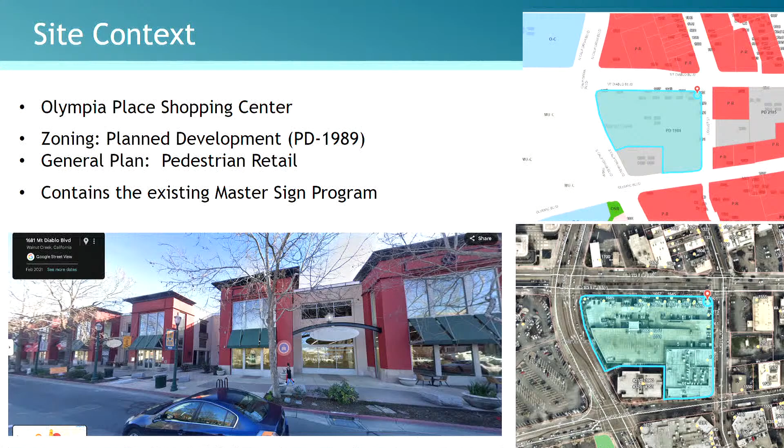Just to quickly orient you with the site, the Olympia Place Shopping Center is located along multiple frontages. The site is zoned planned development with a general plan designation of pedestrian retail. The existing shopping center does have a master sign program that applies to all of the buildings within the center, with different sign criteria tailored for each building frontage and tenant location.

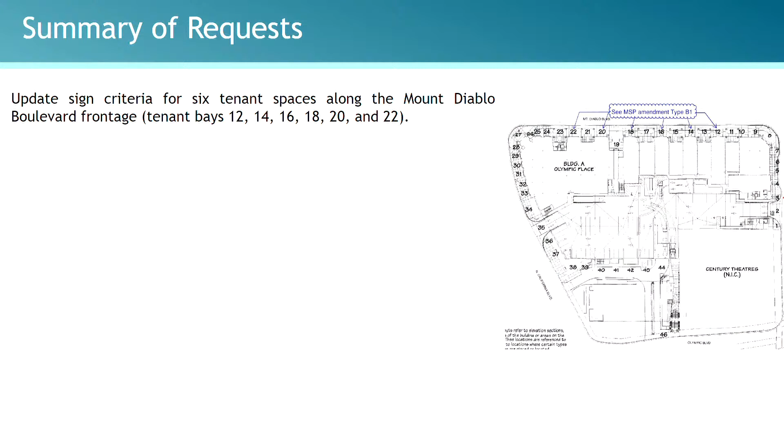The request tonight is to amend the master sign program for signage along Mount Diablo Boulevard. The applicant is requesting to update the sign criteria for 6 specific tenant spaces listed on this slide, all along Mount Diablo Boulevard.

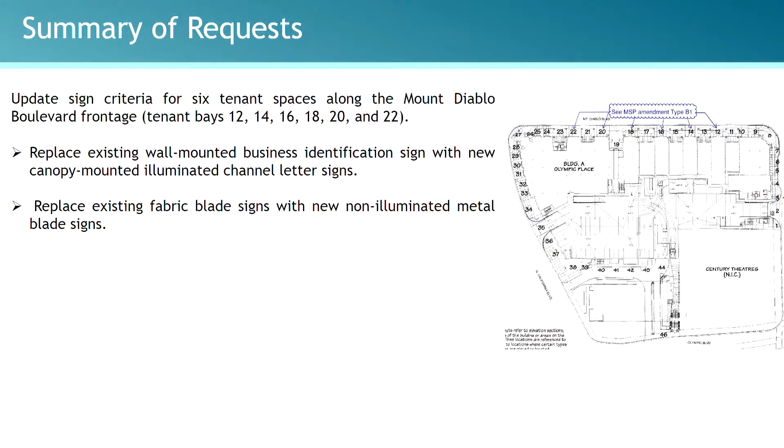The applicant is requesting to replace the existing wall-mounted business identification sign with a new canopy-mounted illuminated channel letter signage, and also replace the existing fabric blade signs with new non-illuminated metal blade signs.

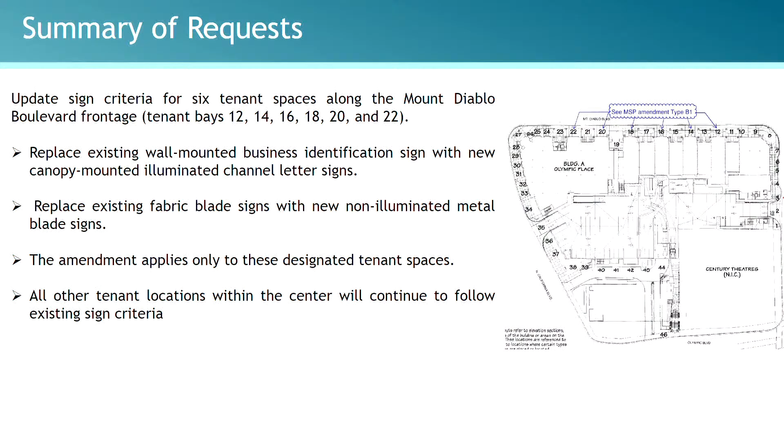The amendment before you tonight does apply only to these designated spaces. All of the other tenant spaces within the shopping center will continue to follow the criteria in the existing sign program.

The applicant did mention that the amendment is intended to modernize the property signage, providing a more contemporary and integrated design with some of the recent changes to the shopping center fronting Mount Diablo Boulevard, which was a new paint scheme, and also replacing the fabric awnings with metal canopies.

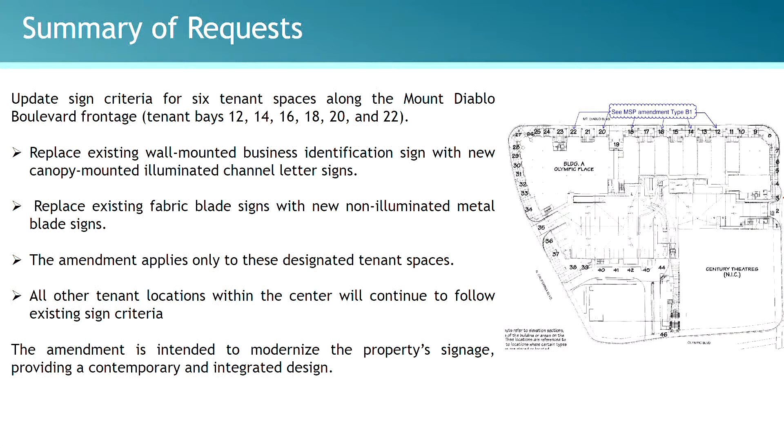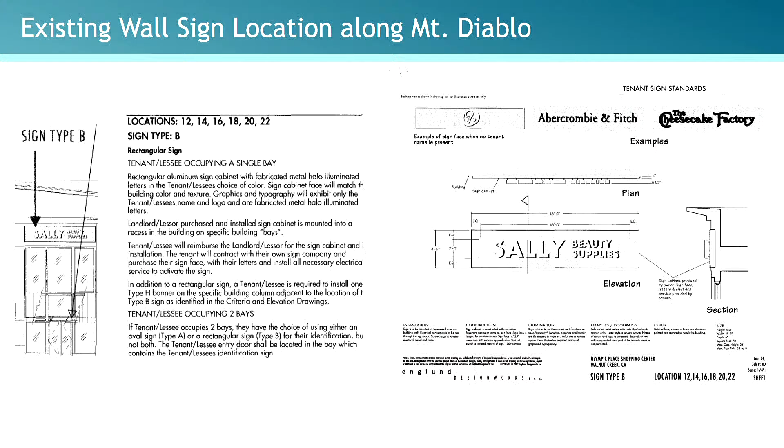Here is what the existing wall sign location along Mount Diablo looks like currently. Signage is allowed on the upper portion of the facade for these specific locations. It's identified as sign type B.

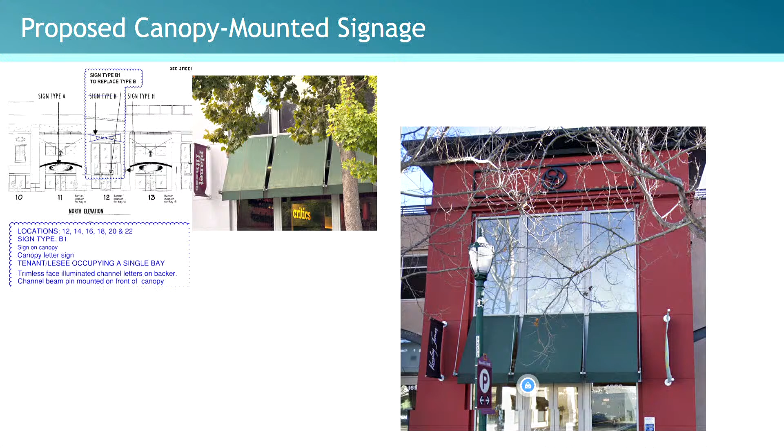So the applicant is asking to remove the upper portion location, as you can see with that sign or logo installed on the existing storefront. It's very high, so they want something more eye level, installed on the new metal canopy that will replace the fabric awnings.

Each sign does measure 2 feet 3 inches in height with a sign area of approximately 21 square feet. Graphics limited to tenant names and logos will be allowed on these sign faces.

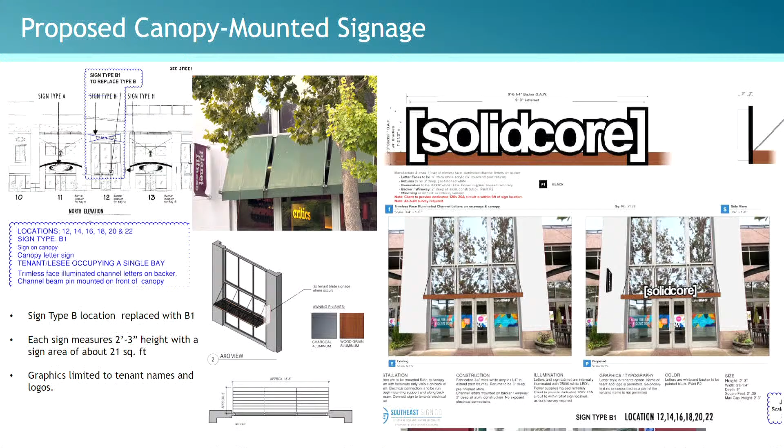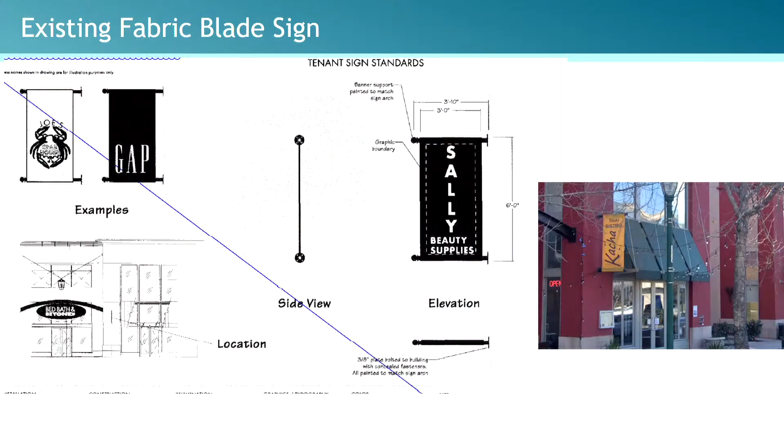Here is the existing fabric blade signs that you see currently within that shopping center, and a photo of an actual one that's there now. The applicant is proposing to update those because the existing ones are worn out and outdated.

The new metal signs will be painted satin black with white vinyl graphics and lettering. They will be non-illuminated and meet the sign limitations, which is typically 4.5 square feet allowed for blade signs, so they'll stay within that parameter.

This project is exempt from CEQA or environmental review, as it's only a change in signage criteria to an existing commercial shopping center. There's no expansion of the footprint or any exterior changes that would require environmental review.

With that, staff does recommend that the Design Review Commission approve the Master Sign Program Amendment for Olympia Place, subject to the conditions of approval in Attachment 1, the draft resolution for this project. I'm happy to answer any questions, as is the applicant. The applicant does not have a formal presentation, but is happy to answer any questions.

Thank you. Does anybody have any questions? I have one, just out of curiosity. So it's only the signs along Mount Diablo that are changing. Why is it only those signs?

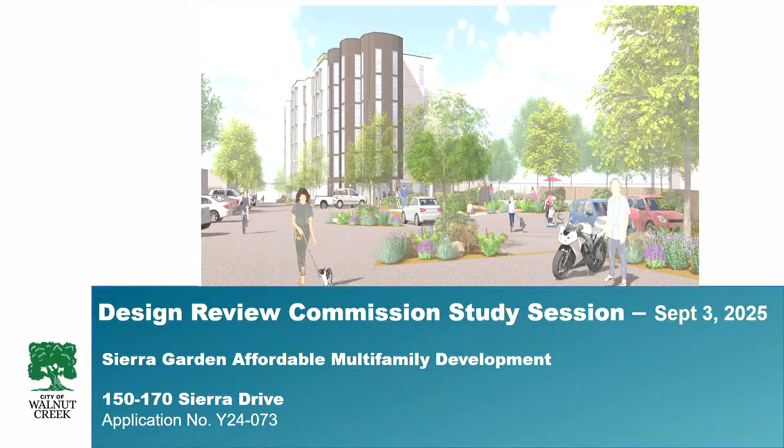I'm back. Simmer Gill, Senior Planner with the city. We are here tonight to consider Design Review Commission's input on the proposed design of the Sierra Garden multifamily development, located at 150-170 Sierra Drive. The applicant, Jonathan Asman, is here tonight, as am I, to answer any questions you may have after this presentation.

To provide some site context, the site is zoned planned development with a general plan designation of multifamily, very high density. This site is located within the city's housing inventory site table, which means the city envisions development of more housing on this parcel. The site is 1.4 acres, with existing 1 to 2 story structures consisting of a 29-unit development.

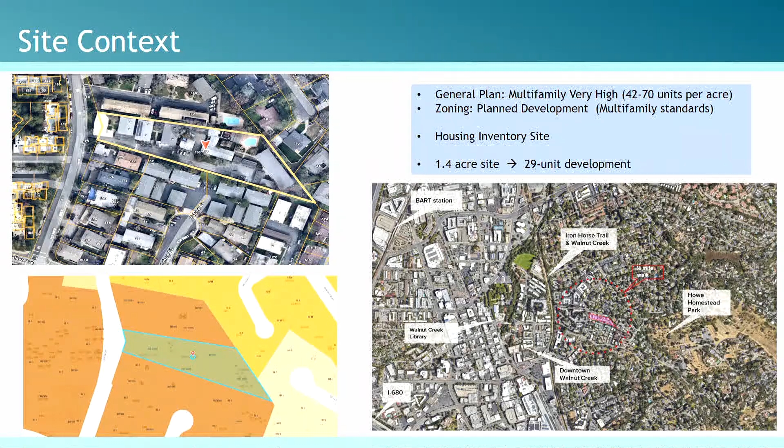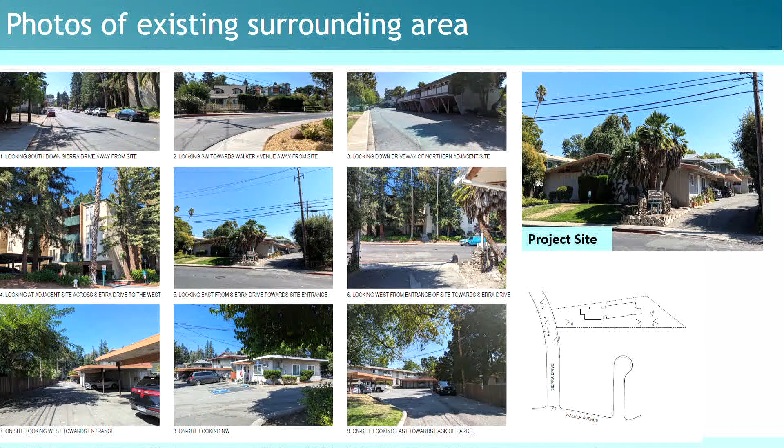Here are photos of the surrounding area as well as the project site. I wanted to highlight that both adjacent properties to the north and south are multifamily developments, I believe 2 stories, and the one directly across the way to the west is a 3-story multifamily development. As you drive further north, there are residential properties, single-family homes.

So the request tonight is to demolish the existing 29-unit structures to construct a new 6-story, 87-unit affordable development. The project consists of a mix of 1, 2, and 3-bedroom units. New landscaping is proposed, and 58 new surface parking stalls are proposed. There is also a request for tree removals and a drip line encroachment permit.

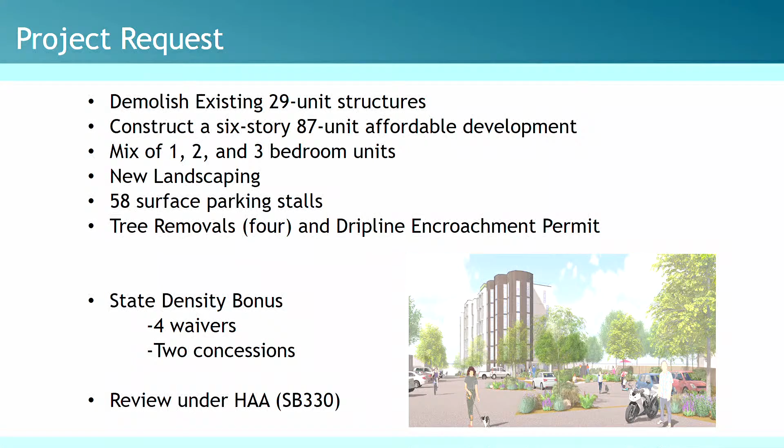This project is being processed under the State's Housing Accountability Act and State Density Bonus Law, under which the applicant is requesting 4 waivers and 2 concessions to the city's development standards, which I'll go into more in the upcoming slides.

Tonight the Design Review Commission's role is essentially to provide feedback, that initial look at the project, on the design of the new development, the requested tree removals and drip line encroachment permits, as well as the requested waivers under state density bonus law. However, the approving body that will consider these entitlements will be the Planning Commission.

As mentioned earlier, this project is being processed under the Housing Accountability Act, also known as SB 330, which essentially limits the city's review if the project meets all of the applicable objective standards. The project does fall within that criteria, as it is a residential project with multiple housing units, and it is consistent with the city's objective standards as well as the city's design standards.

Going over the base density for this project, it is a 1.4 acre site. The multifamily very high density range is 42 to 70 dwelling units per acre, which equals 99 units as the base density. It is a 100% affordable project, so the applicant is entitled to an 80% increase in density, giving them 79 additional bonus units. With the bonus units, they could have essentially 178 units allowed for this site. The applicant is building 87 units, which complies with the zoning and base density of the general plan.

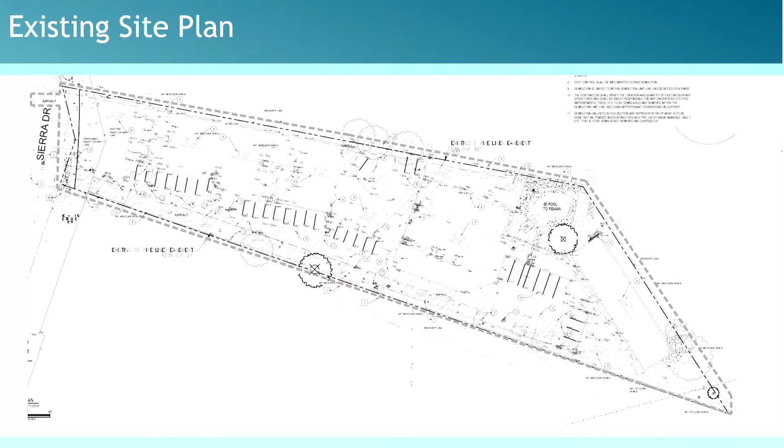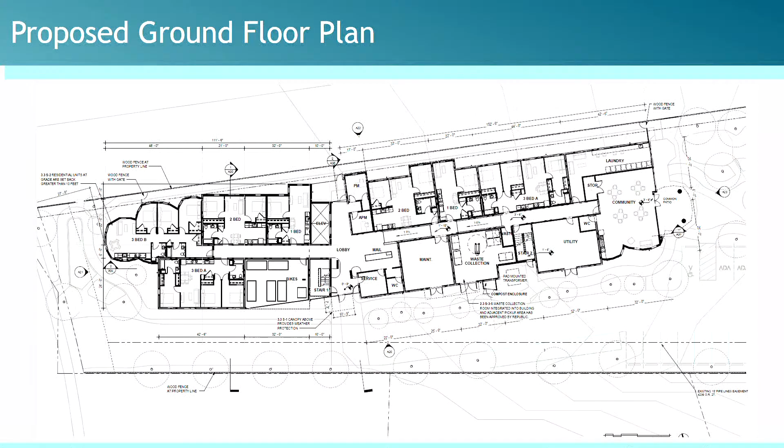Here is the proposed ground floor, the first floor. This shows as you enter from the middle of the site into the lobby, they have the mail pickup area. There's also a trash enclosure area inside the building, offices, as well as utility and laundry room, and a community room for the residents, which opens up to the proposed garden area and existing pool towards the back of the site.

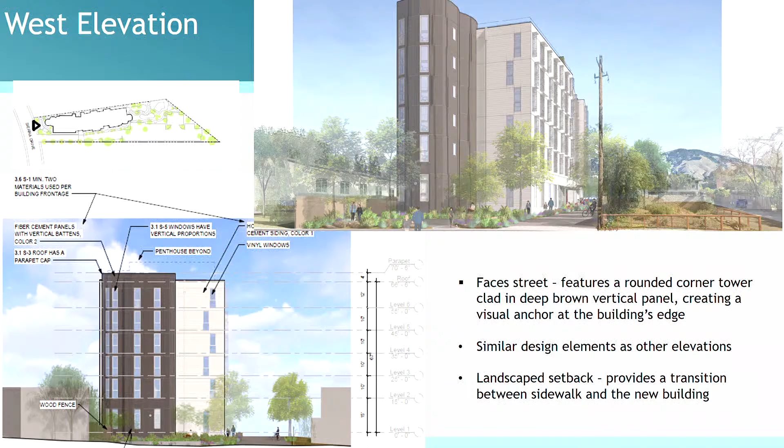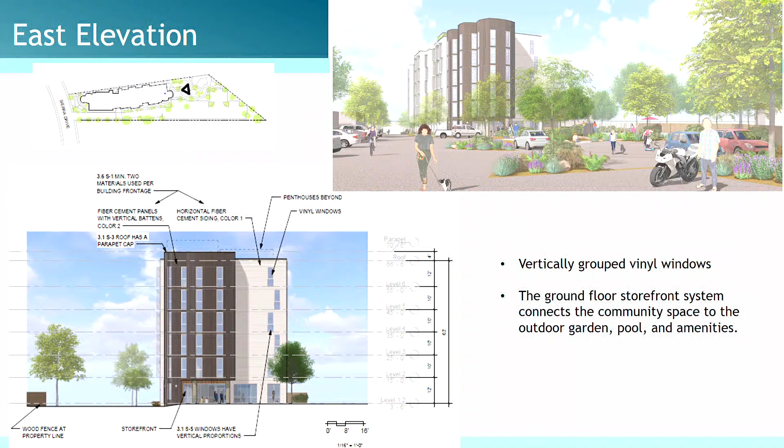Here is the east elevation, looking to the back of the site, which is the rear of the site. The ground floor storefront system connects the community center that opens up and connects to the outdoor garden, pool, and the amenities located at the back of the site. And here's just a closer look at the view of the entrance from Sierra Drive.

As part of this project, the applicant is requesting tree removals. All 17 trees on site will be removed for the proposed construction. Many of these trees are undersized, meaning per the city's tree preservation ordinance, a tree that's 9 inches or greater is considered a tree and requires a tree removal permit.

Some of these trees were in poor health, so the city arborist was able to approve the removal, and all of the undersized trees are allowed to be removed without a permit. The remaining 4 trees, circled in red, are Siberian elm, plum, palm, and privet. They do require Planning Commission or the highest approving body approval to consider removal.

The project is also working within the drip line of several neighboring trees, highlighted with a green star. All of these trees will be protected during construction. Tree number 393 is on the neighbor's property at the south property line, and that requires authorization from the adjacent neighbor to remove. However, the city arborist supports the removal, given that it's located near the emergency vehicle access, which is required, so the arborist can support removing that tree.

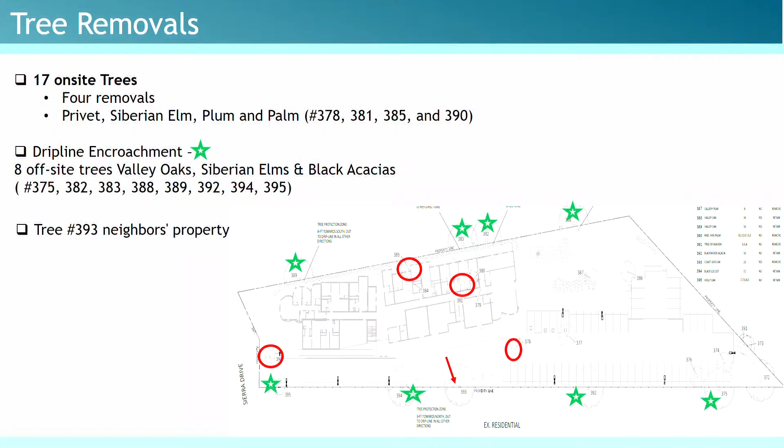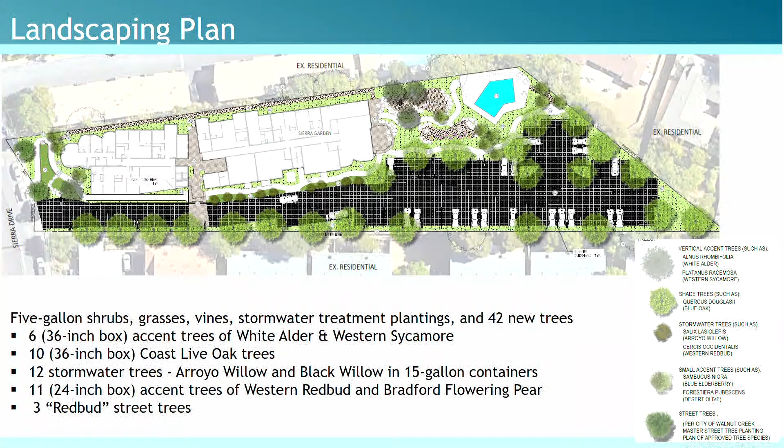Here is the proposed landscaping: 5-gallon shrubs, grasses, and stormwater plantings are proposed, as well as 42 new trees listed on this slide, ranging in size from 24-inch box to 36-inch box trees, as well as 3 street trees.

Here's a closer look at the landscaping plan. The design retains the existing pool in the rear. Key site improvements include permeable paving in the parking areas, a new pool deck, resident garden planters, play areas, and seating benches. Landscaped open spaces connect with the garden and the pool, and are enclosed by the proposed perimeter wood fencing along the sides and rear of the property.

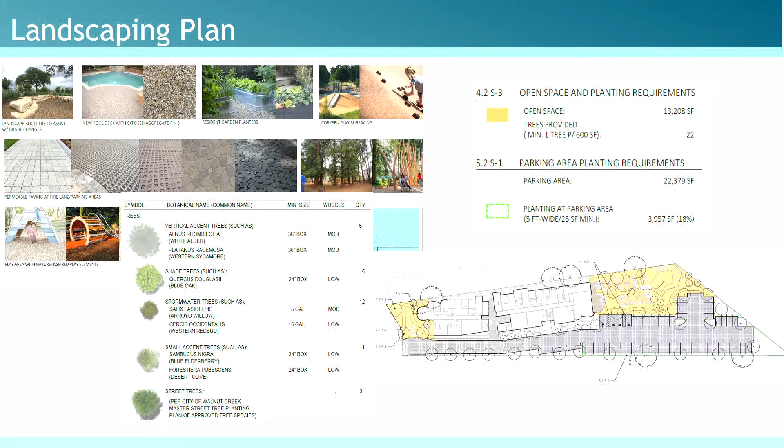Staff recommends that the Design Review Commission provide comments on the proposed site design, building plans, landscaping plan, as well as the tree removal requests, and provide a recommendation to the Planning Commission on the design, the requested waivers, and the tree removals.

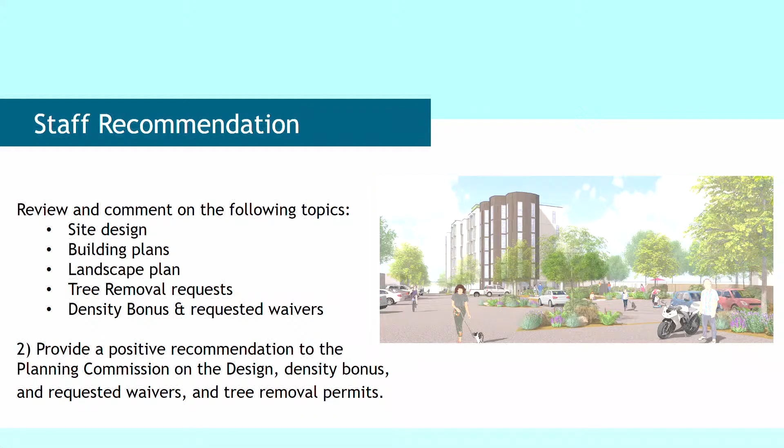With that I conclude my presentation, but I wanted to state for the record that staff received about 5 letters from neighboring properties, mostly in opposition to the project, citing density, dense project concerns, traffic impacts, and similar comments. Copies of all those letters have been provided to everyone tonight. I wasn't able to address each letter line by line, but that is the purpose of our Planning Commission staff report, when the approving body wants an analysis of each point raised by either the Design Review Commission or the public.

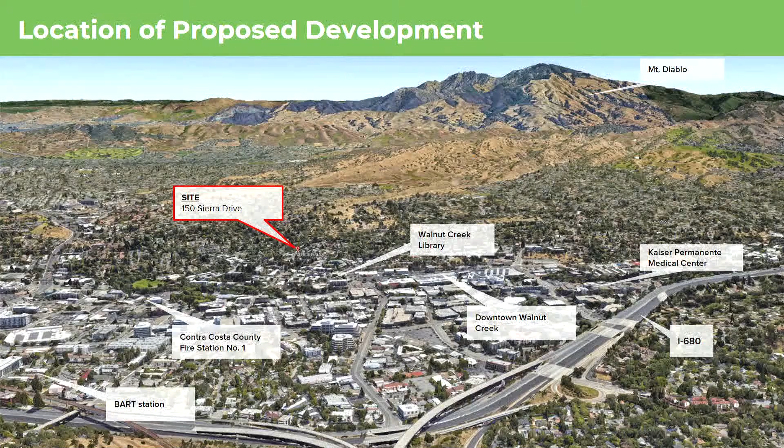Samir explained all this, so I'm just going to skip these. These are the data of the project, where it is - it's basically right at the edge of the downtown and the more residential part of the city. 29 homes in multiple buildings, with a big parking lot basically.

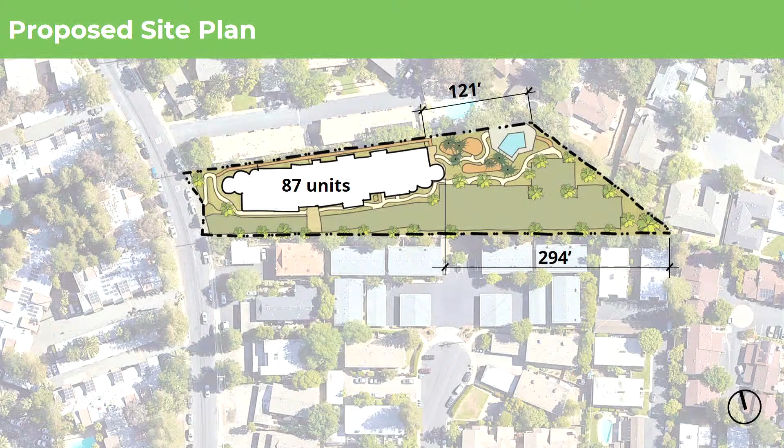It's a very difficult site because it's very narrow on the street frontage and opens up. We need to bring fire truck access to the site, which made it really challenging. But it's also an opportunity to have the largest gap possible between the low-rise end of the site and the street. We have over 120 feet on one end and almost 300 feet on the other between the building and the edge of the property.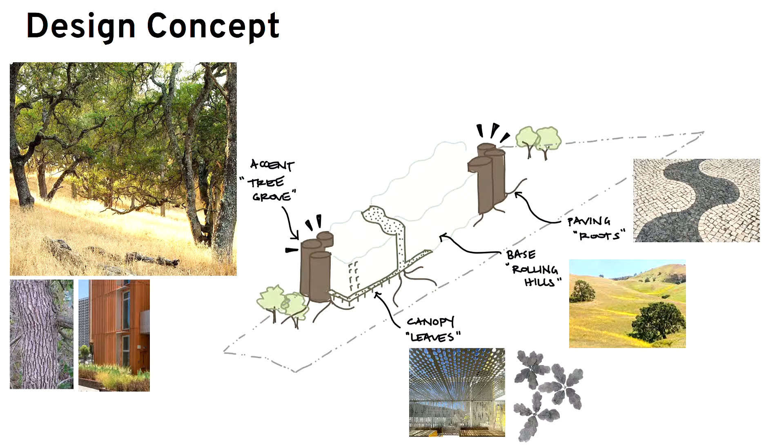We're bookending the whole massing with these organic forms, and defining the entry with screens and perforated metals, with a base background material that is durable, which is also essential for affordable housing projects. A large portion of the site is parking, since we have surface parking, but we made sure these are permeable pavers, which helps with drainage and the overall site diagram.

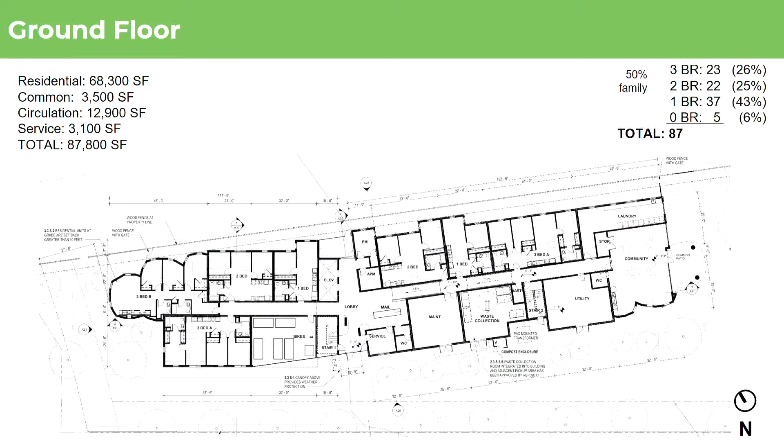I want to point out this open air entry - it's essentially what it is, open air, with planting breathing into the lobby. That also happens on the upper floors. So you can see the ground floor, and on the upper floors we also keep that openness. You come out of the elevator, and that helps you orient where you are in the project and also have access to light at every floor.

The entry experience - you always can see multiple materials when you look at the project, regardless of the angle. The bookend shows the organic form on one end and then the background material. The windows facing south will have a perforated sunshade.

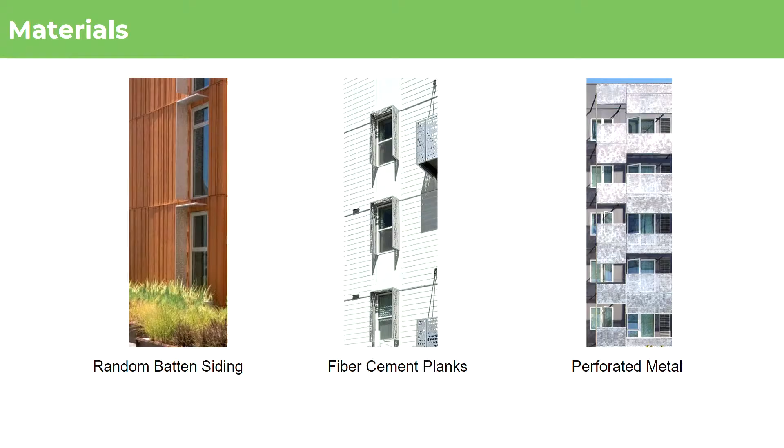In terms of materials, one thing I want to point out is this random batten siding that we pioneered in the office. It's essentially Hardie panels with Hardie trims nailed onto it, creating this exciting and textured material that is also affordable and durable. So this is our bookend material.

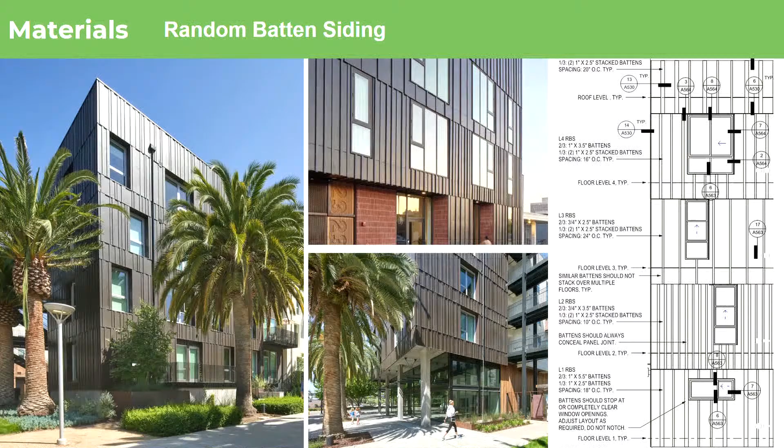The entry is also marked with these perforated layered screens that come in front of the open stair we had, which also marks the entry.

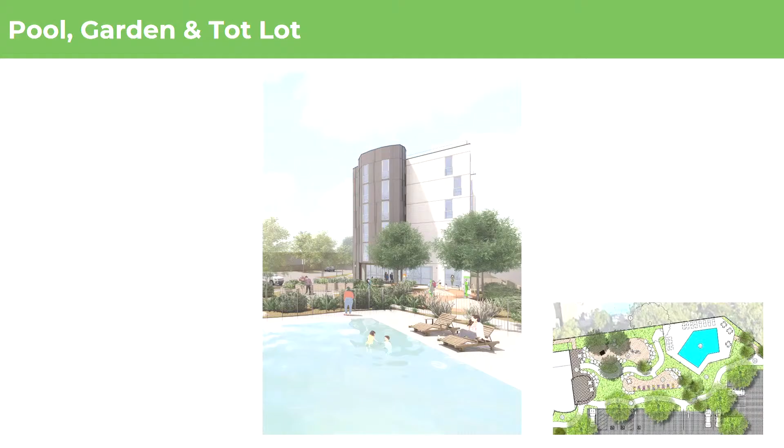This is an example of a project we recently finished on the Coliseum BART. As you stand on the sidewalk, you can see the entry and the perforated mesh. As you enter the site, you can see the screen covering the open air lobby on the upper floors and the ground floor, and it wraps the bike room. And also this through-view into the lobby and beyond. In the back, we're going to restore the pool and have the community room that opens to this beautiful, nicely landscaped garden.

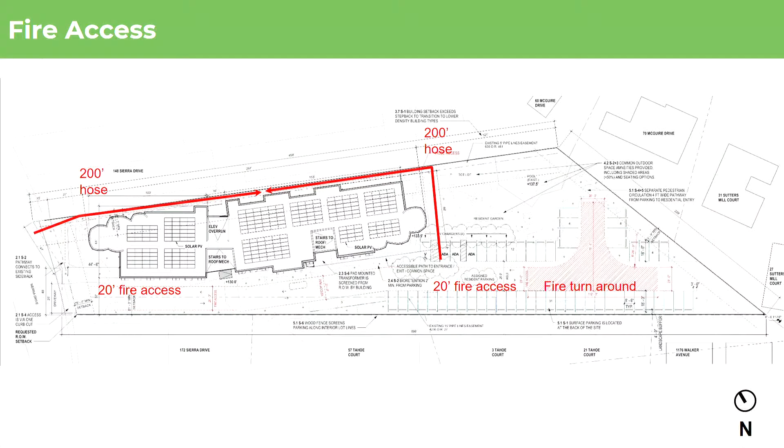And I want to finish with the fire diagram, because it's a very difficult site. In order to bring the fire truck access all the way to the end, it's really limited, and that explains why we put the building where we put it. Thank you.

Any questions? Yes, I do have a question. Is the resident garden rentable plots that residents can apply to maintain, or is there a minimum level of care that goes into that? Talk to me about that.

Yeah, it's usually something we believe creates community. It's something the residents take on. Usually there's a committee that whoever is interested will be in charge of, and it's something to bring the community together. But yes, it's usually run by the residents, and the property management will have oversight on it. I'll let Jonathan explain it a little more.

From what I've heard from our resident services team, there hasn't been a building where there's not enough space on the waiting list. You could give someone a little more or less space, but not everyone's interested, and usually there's enough space for everyone to get a plot to grow herbs or vegetables.

Okay. And have you guys considered things like outdoor gathering spaces that aren't just playgrounds and a pool? Or is this really the primary programming you feel like people want in these environments?

We went through a number of conceptual designs. Several of them had almost no outdoor space. And what we really like with the 6-story version is we actually have dirt, and I don't know if we could zoom in, but maybe you could describe it.

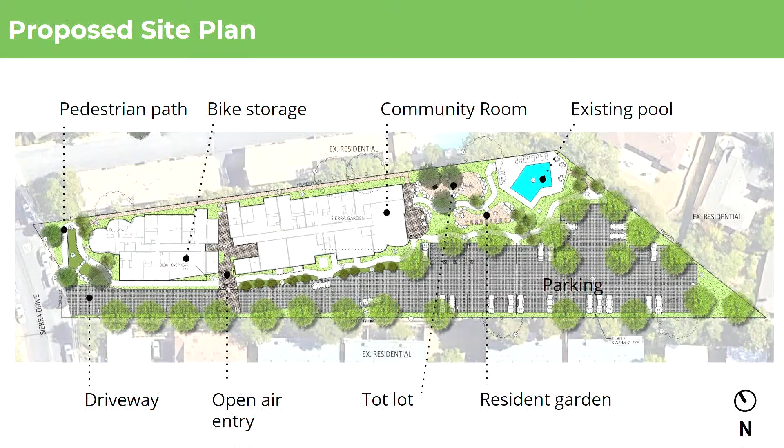Yeah, you asked about informal kind of hangout places. There are areas there - Patram could point them out, including shaded areas. So we have what is marked as the community room that really opens to that covered but outdoor space. So that's the flexible outdoor area that's also buffered with landscape. That's basically the area for outdoor use.

But we also wanted to have the resident garden that is also very flexible, so depending on how much interest you get, you may add or deduct the planting beds in that area.

Okay. Those are my questions for the moment. You guys have any questions?

Maybe let's take a look at the elevations, if you can. Could you explain for me how - obviously great renderings, great photographs that you provided - that kind of variegated siding, where does that occur?

So what you see as the darker material is that random batten siding. So the bookends, essentially, where you see it a lot, has that premium material. And then everything in white is basically just horizontal Hardie plank. Yes, right?

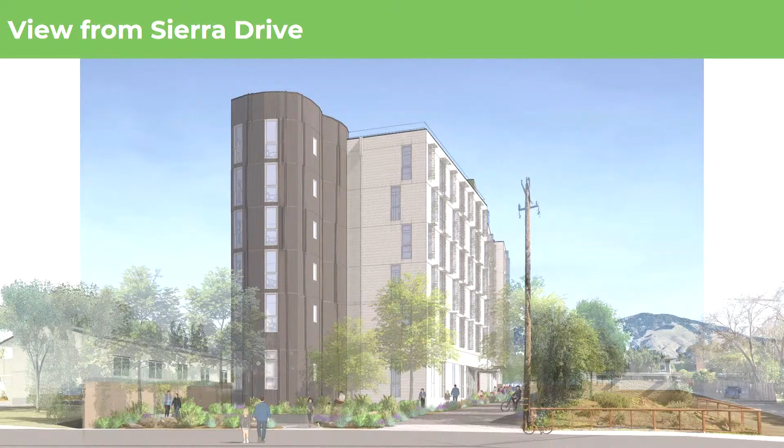All right. Maybe let's look at the side elevation a bit. Samir, I don't have the actual elevations. That's all right. But yeah.

Okay, yeah, so everything that's more or less in white, it's all horizontal white siding, right? Yeah. And then the kind of gray in the middle is the screen - that's the perf screen. And then you have the green block, which is - I can't read that. That's just green, it's also fiber cement panel. And then, going back to the site plan, let's talk about what is around it.

Matt, I just recall most of what's around this. Maybe there was one that was more of a Google view. That's fine. I mean, is what I'm looking at to the north of that block apartments? That's right, 2 stories. And to the right, that's all single-story residential? Right. Okay. And then what about on the bottom? Those are also apartments, all more or less 2.5 stories, right? Yeah.

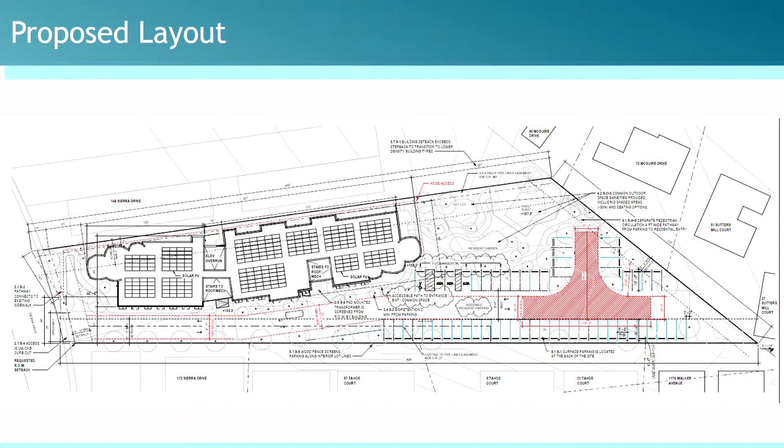I believe that's parking with 2 stories of apartments above. That's it for now. And there was one thing Samir said that I thought was interesting - I mean, you guys did look at units as many as 178 units on this site or more? That's right. All what is now landscape used to be buildings, and then it was essentially too big of a building. So talking to Jonathan in terms of management and what's appropriate for this building, we made the building smaller.

Would you say that there's more landscaping and more open space now than there is currently, more or less, or about the same? If you don't count the parking and the driveway as open space, there is more usable open space. And how about what is the parking now on the site versus what is proposed? Jonathan, how many parking spaces do you have right now? I don't recall offhand, I could follow up with that info in the morning. 30? Okay.

I think that's good for now. Okay, thanks.

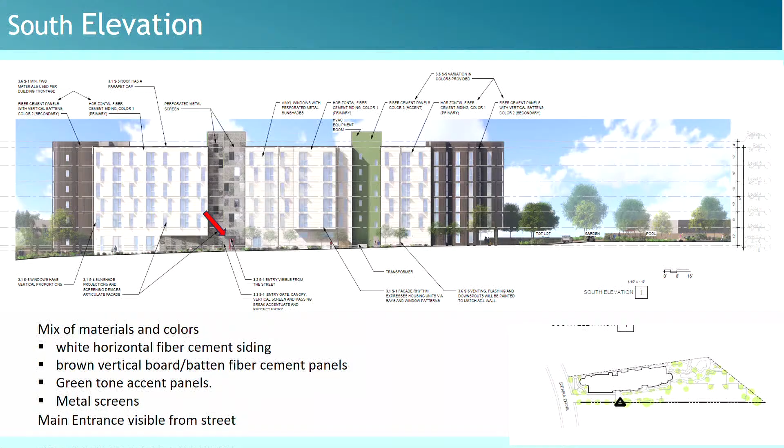So I think that in blending with the trees and blending with the hills, the brown tones are really nice, the green tone is nice, and maybe incorporating more within that range - more of the green tones, different shades of the brown tones. I like that it's not like what we've seen a lot of, where it's these funny boxes in yellows and oranges. It's nice that it's in those natural tones, but bring down the white and incorporate more of the greens and browns and maybe even some organic grays. I think there's a slide in the presentation that shows the inspiration for that organic feel.

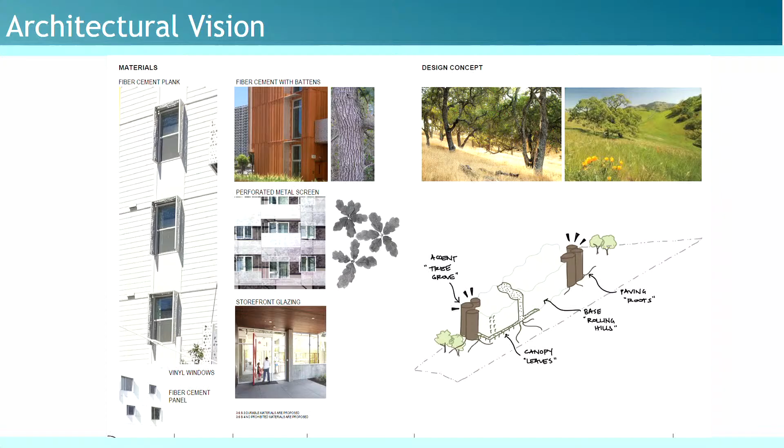Thank you, there. So I echo all of their comments, that's why I didn't make them again. But where you see the fiber cement that almost looks like wood, that could be more organic, as they said, which would be helpful. And looking at the canopy leaves, there's more perforation at the base, which I know happens in that central area, but that's actually recessed - it feels like the jewel of it is that netted central piece, but it's tucked in.

Yeah, I think the balance - the detailed materials they're showing are great. I think they should turn up the volume a little bit on those things. I don't like the white - I like white buildings, but here in Walnut Creek it's beyond just the fact that it doesn't fit. We have a lot of bugs and spider webs and stuff, it shows a lot on the white.

That's why - I have a white house, my wife wanted to paint it white. We're constantly out there with a broom wiping everything down. You're not going to wipe down six stories.

Okay, so I think we've settled out. Also, shade study? Yeah. Yeah.

Maybe on that corollary, show at the Planning Commission, sectionally, how far away it is from various property lines.

Can we back up for one second? Go to those elevations one more time. Go to the other elevation, the opposite one. That one, I think, needs more work than the more exposed one. That's going to be right up against the other property lines. So, all elevations - the two long elevations, the front and back, I think are fine.

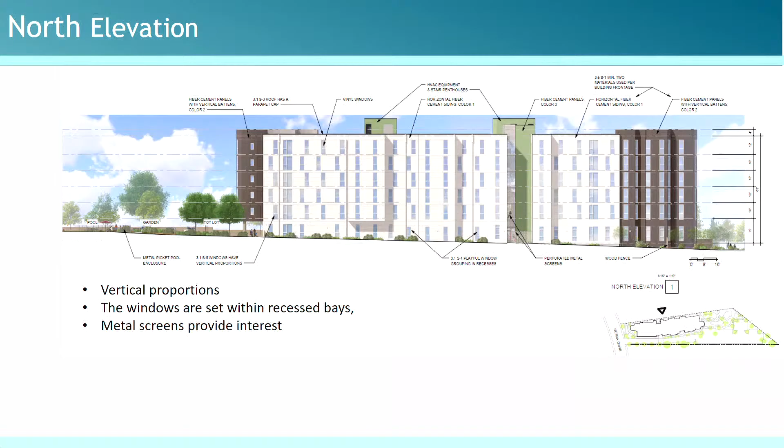Got it, keep rolling then. Okay, and then there is also discussion of bike parking and loading zone, which is site improvements. They're required to have bike parking, and it's a pretty big number. It's probably inside, but there might be some outside parking for visitor parking as well.

I'm surprised there's not on here, but I would bet that it's programmed. Correct? Yeah, yeah. 60.

Okay, and then we can take a look at the loading issue. I think when you present a plan, you're going to need to make a better case of how all this can work. I worry though, like loading - I feel like it's hard for us to say we need loading, but also say we don't have enough parking.

So we'll have to give up a parking spot for loading for the Uber and Amazon, or do they just block it for a few minutes and then go?

I don't know, the loading didn't bother me. It was just the one thing I was like, okay. But what about when people are moving in and out? Don't they need the loading then?

But doesn't that seem like maybe two days out of 365? You know what I mean? If we're that hard pressed for parking, loading is one of the first things I would vote to give up. I don't think it hinges on one or two parking spaces.